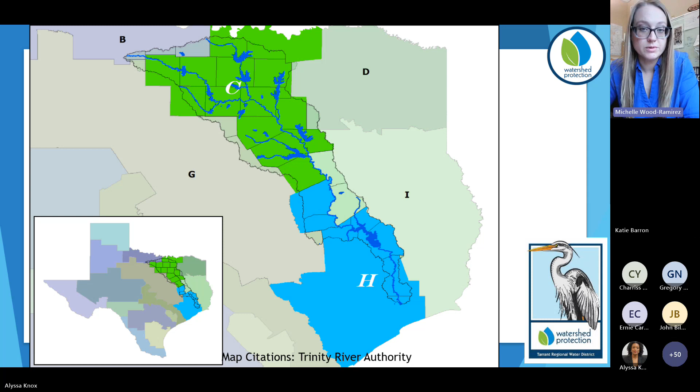You could go to the next slide. Yeah. So this is another slide that I had from TRA, and you can see the Dallas-Fort Worth area and then the Houston area down lower. So I'm going to talk about the DFW area. If you could go to the next one.

So Tarrant Regional Water District, or TRWD, is a raw water supplier, and I'm in the environmental division in the watershed program. I hope everyone knows what a watershed is, but TRWD owns and operates 4 reservoirs, and you can kind of see that there's 2 reservoirs on the top, Lake Bridgeport and Eagle Mountain, and 2 reservoirs on the eastern side of the map, Cedar Creek Reservoir and Richland Chambers Reservoir. And the area that drains into those is its watershed.

And our team is, again, we're watershed coordinators. We do source water protection. So we don't have any jurisdiction in the watershed. We only have carrots and incentives, and we can offer our staff time and advice, but we want to amplify and promote best management practices for source water protection. And our office is located in Tarrant County.

So if you click one more time, okay, click a few more times.

So this is some really fun facts about our program in the district. The district does a lot more things than just watershed. We're a very, very tiny portion of the company. Ultimately, the water that we have in the reservoirs and pipelines is pumped back up to the top to Eagle Mountain and then distributed down through the water supply system. And ultimately, it serves over 2 million North Texas residents.

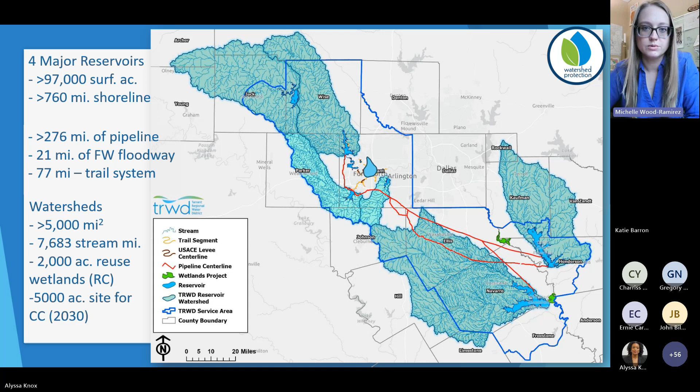But I wanted to put everything in perspective of why stormwater is really important to not just our office and our company. Eventually, it all will fill up our reservoirs, but the district also does flood management. There's a recreation component. We're a local sponsor of 21 miles of the floodway through Fort Worth. So the district does a lot of things, and being a good steward and leading by example is one of the things that we're able to do here. So we're going to look at what we've done on campus now that we know how we fit into the bigger system. If you could go to the next slide.

All right, so the TRWD Rainscapes is, like I said, at the Fort Worth campus. And these polygons here on the screen highlight the different best management practices that we have demonstrated here. So rain garden, the overlook is that pink area. That's just the name that we call it. That's not a BMP, but at the overlook there's a big elevation change. That's where we've demonstrated our permeable concretes, our grass pavers. The rain garden is part of that system.

And then what's brown is the stormwater landscape. So those are our native and adaptive plants, water conserving, drip irrigation wherever possible. And we also have some rock channels and bioswales incorporated into those systems. So you'll see some videos of that later. And then the orange is a bioswale, and what I'm going to talk about for the construction lessons learned is our wetland, our redesigned stormwater wetland.

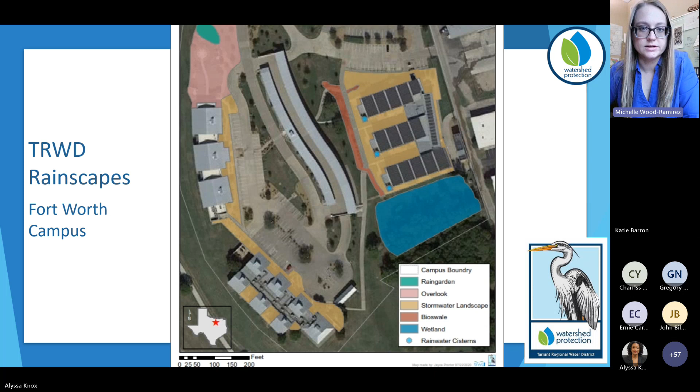So you could go one more. Okay. Yeah, if you can finish off that side, that'd be great.

Perfect. Okay, that's fine. What are rainscapes? So we are calling this the TRWD rainscapes. I didn't come up with the word rainscape, but it's right. You think of landscape or xeriscaping or different things like that. So a rainscape is the design to reduce stormwater runoff. So ultimately, we want to make the stormwater an asset instead of something that is affecting us negatively.

If we think about rainwater or stormwater, that's really pretty much the same thing, but the connotation you have with it is different. So rainwater, rainscapes, rainwater harvesting, utilizing it as the asset that it is, and designing your landscape with the plants and the slope and the bioswales so that we can hold it in place. Again, it slows down the peak flow in the hydrograph. So flooding is really important in urban areas, but also the water quality improvements are really great. And then the added benefits are recreation, air quality, heat island, wildlife. So there's a lot of benefits, but that's what a rainscape is. The link at the bottom is where I got the idea from, if you're interested, Montgomery County, Maryland.

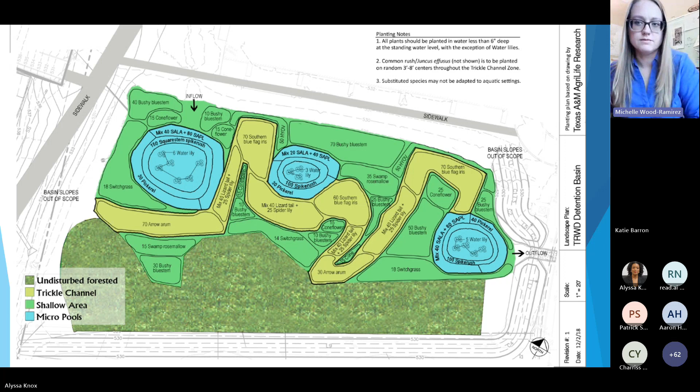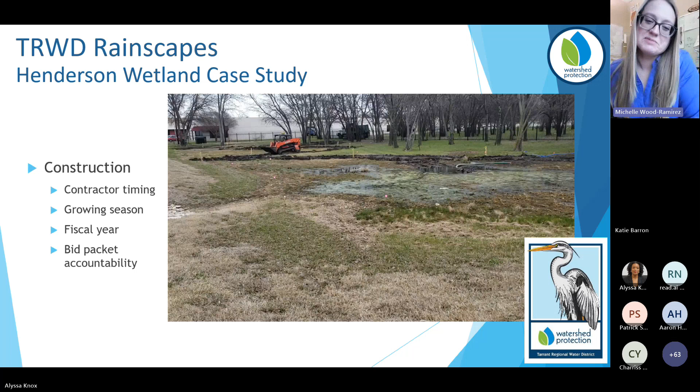The design phase is really critical for internal stakeholders, or your community if you're doing this in an HOA. So stakeholder building is really important. Design, planning, getting everything done, and then construction. My dad had a construction company when I was little, and so I just thought that I knew things about construction. But again, with that bid packet process, trying to find allies for that and learn a lot about that before you start a project, I would really suggest that.

Vendors, again, because of that meso project scale: the residential landscapers are great. They have the talent, but it's very hard for them to go through our CivCast process and our budgeting system and get the insurance they need. So it's very hard for them to scale up to work with a state agency and go through all the formal processes. And again, it's not going to have the price tag to attract the bigger companies.

So one of the things that we're doing is trying to partner with different groups or agencies so that we can do more training, more certification, like Green Pros, so that we can train people to be in this niche market, because there's really no vendors that bid on the big projects. It's very hard to find people. And then final inspections, that's also really key, to know exactly what you want before you sign off on their last check. And then I've already talked about everything else. So you can go on to the next one.

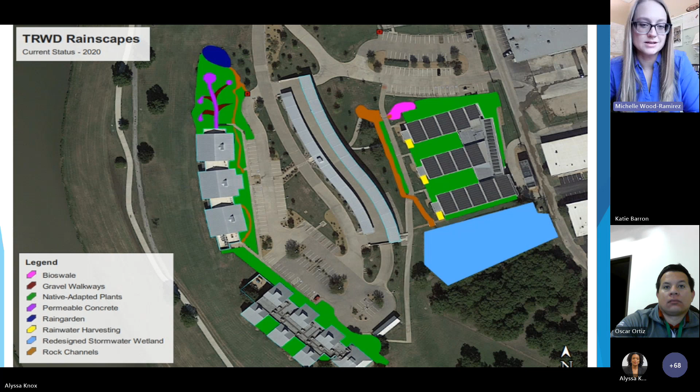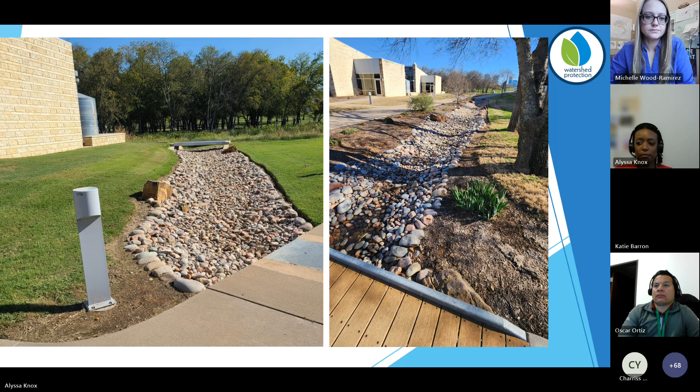What happened in reality is that the edge kept going farther and farther back, mostly defeating the purpose of having grass in the first place, because there's no grass. So that's another huge issue we're still trying to deal with. You go on more. Buffalo grass getting driven over and mowed. It's supposed to be mowed once a year, and they mowed it anyway. So that was this spring. Super fun. If you could go on more.

So if you go one more. This is something we tried with our contractors. It's what we have to submit to the city of Fort Worth. It's in English and Spanish. And so far I haven't gotten a single contractor to fill it out. So, but I have it and we do try to work with them.

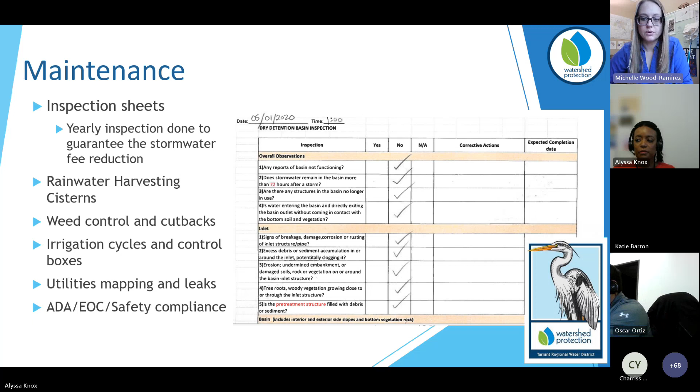And there's a ton more maintenance issues there as well, but I did highlight like the weed control, cutbacks, irrigation, leaks. And if you go one more. The only way we've been able to address some of these things is education. There's not like fines or anything we can do. And then switching to a new company isn't really an option again, because our vendors are limited. The skill set is limited,

and we just need a market for this, for green stormwater infrastructure in the region. We're going to be doing it a lot more. So we're working on how to do trainings for that. We do a lot of education for the public, but also for professionals in this area. And then in order to justify things, recognition and awards is important for our board to justify some of the money and time.

And it's a demonstration project, right? I'm a scientist, so I want to learn what works and doesn't. And that is not always a good sell. So we have to find data and metrics and make sure that we can also do that side of it for the public facing side. One more.

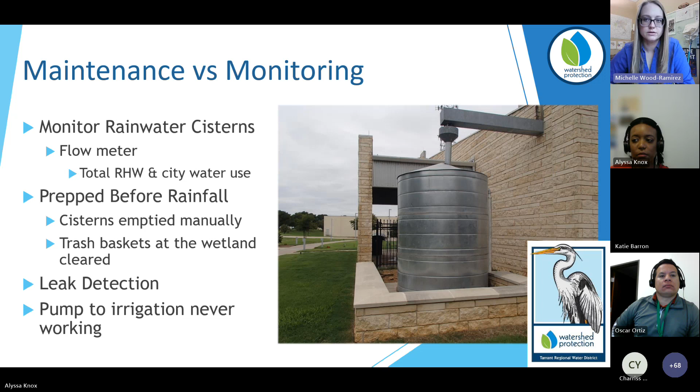I don't have time to do this. I normally don't. But again, maintenance versus monitoring, the photos, who comes. So if you're going to build this, also building in a monitoring program as well as a maintenance one might be a really good idea, so that you have what you need to write awards and go for grants and things like that. So I just wanted to clarify there's a little bit of difference in those two aspects of it.

Yep. So be as specific as possible. Don't do the cheapest bid. Please don't do it. I don't know if that's good justification when you are comparing things. And then the more you can have relationships, engagement, and your internal and external collaboration and stakeholders, the smoother it's going to be, I promise. But it is a lot of work.

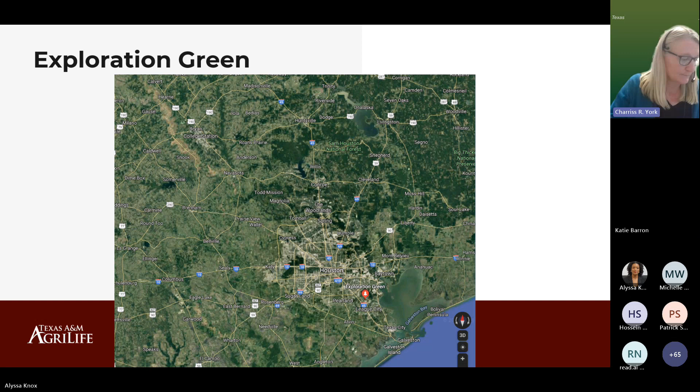So let's go next. Yeah, so this is a view of what this area looks like now. And when I look at this aerial, what I see is typical suburban development. We see single family detached homes, we see fairly large roadways, we see lots of impervious cover, whether that's roadways or parking lots or rooftops, and that has led to increased flooding, degraded surface water quality.

Every water body in this area is listed as impaired by the Texas Commission on Environmental Quality, mostly for high levels of bacteria and low levels of dissolved oxygen. And in general, there's a lack of green space.

And so because of this flooding issue, the Clear Lake City Water Authority, who is the entity in this area tasked with taking care of both the drinking water and the stormwater, started to explore solutions for the flooding issues that they were seeing.

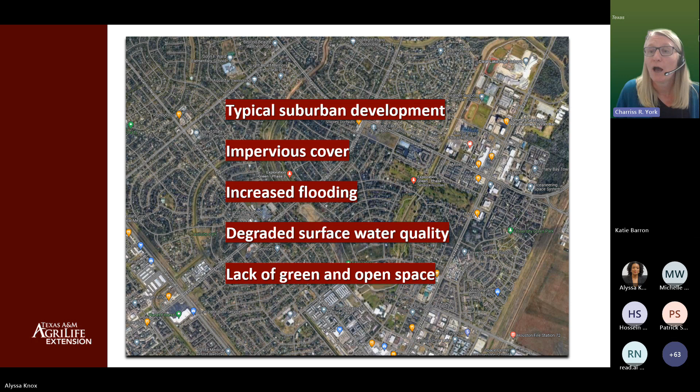And so looking around the community, they were getting a lot of input from residents that they wanted to see some sort of additional parkland or more areas, or could we use some of these wetlands they were hearing about, and how could these things fit together? And so next, they were able to, one more, identify a golf course.

So back in the 1960s, the height of living and what everyone wanted was to live on a golf course. And so golf course communities popped up around Johnson Space Center. But over time, less people were interested in living on the golf course. The golf course was not being utilized as much. And so it had really become an eyesore. It wasn't being used for anything.

It was defunct. And so the Water Authority saw this as an opportunity, and they were able to use their power of eminent domain to purchase this golf course. That was after a lot of studies were done, conversations were held with the public about what they wanted to see and how it could look, and they came up with this master plan. Next.

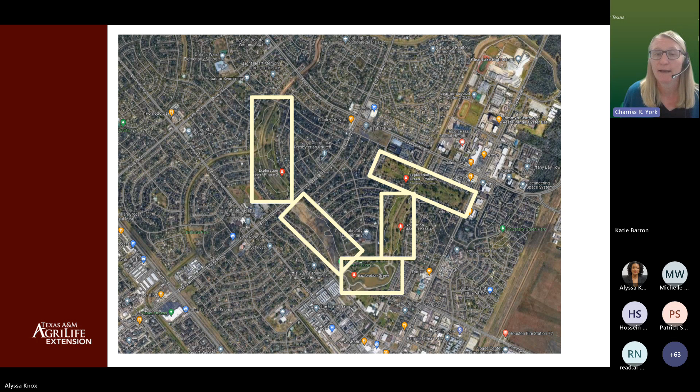So this is the master plan for Exploration Green. It's almost 200 acres of what was previously golf course that's been re-envisioned as a stormwater detention and nature park. So part of this project is about 40 acres of constructed stormwater wetlands, as well as a 10-foot wide concrete

hike and bike trail, native tree plantings, and tons of different types of habitat for suburban wildlife, things like bats and birds and bees. And we even see alligators and nutria in this area. So we're going to talk for just a minute about constructed stormwater wetlands and what makes them different from a natural wetland system. So that's our next slide.

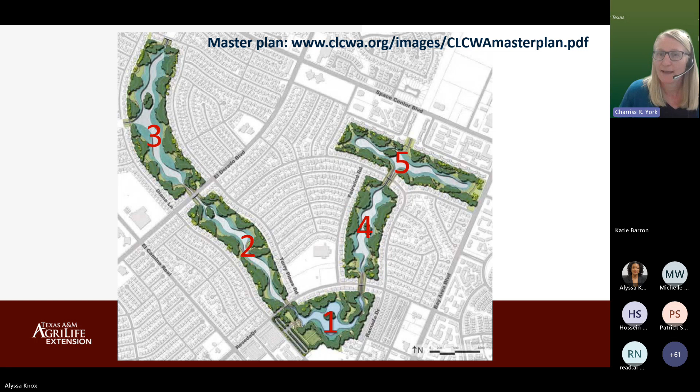So Michelle mentioned a little bit about the constructed wetland that they had built at their site. And I want to talk about how they're different from a natural wetland. So these are very engineered systems that have some very specific requirements that we look for in them. So because they are stormwater detention, we need to make sure that they are deep enough to hold the water.

And as Michelle mentioned, there's permit requirements. They need to hold water for a certain amount of time, not hold it for too long, make sure of releasing that water. There's all of those components that need to be considered. From a water quality perspective, you want to hold the water long enough that the wetland plants and the biofilms and all of those components of the wetland have time to actually filter and treat that water.

So the image on the right and the different colors, the dark blue is what we consider a deep pool. It's usually about 2 foot deep. And we're looking to hold water there most of the year. So this gives a spot for any of the fish that find their way into the system. Even in the summer and a drought, when things are getting really dry, we have a deep spot to hold that water and a point of refuge for those species.

We're also looking to move the water intentionally through the system to give us a longer residence time for treatment of that water. And so there's some shallow zones and some intentionality to how the design of the water flows through there. But then we also have plenty of room for that to fill up and to be inundated for short periods of time, up to about 72 hours while that water draws down.

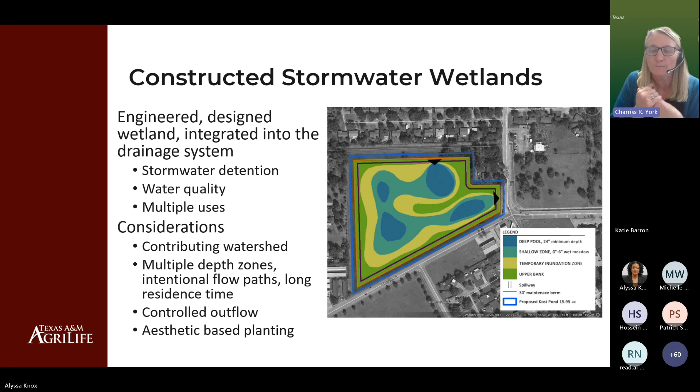So I think that's all I want to say about some of the specifics of a stormwater wetland or constructed wetland and how it's a little bit different, and some of the things you might consider during the design process. So, okay, we're going to skip to the next slide.

Okay, so we're going to go back to Exploration Green now. And I told you that Exploration Green used to be a golf course. So I have a couple of pictures for you. I should say that it's a 5-phase project. Phase 1 began construction in 2017. And actually phase 5 finished construction in September of this year. The planting is still ongoing for multiple phases, but the actual construction of the ponds and things has been completed.

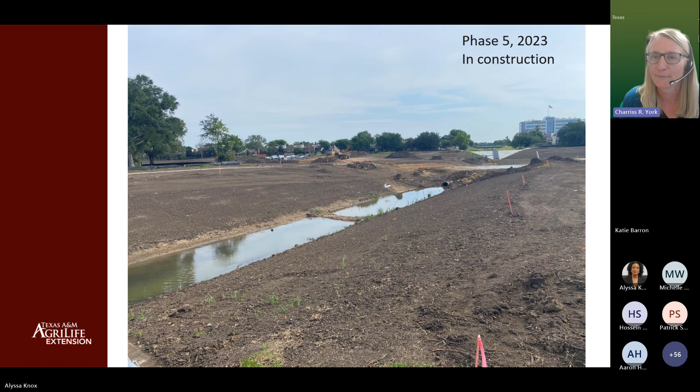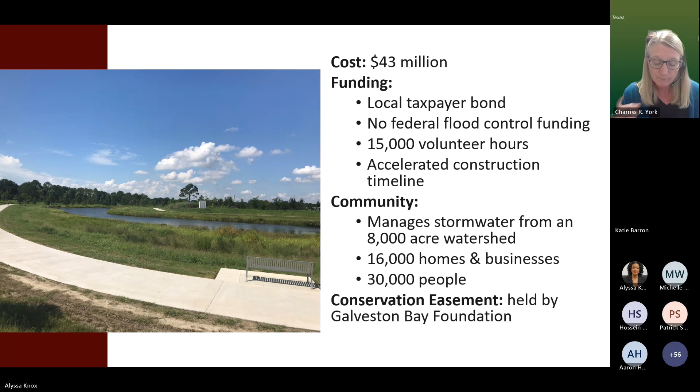And they did that because they realized moving forward, because it is an elected board, that the folks who started this project could be voted out at any point, and the intent of this project could change. And so they put it under a conservation easement so that it will continue to be a nature park and to be used like this for a very long time to come. And it cannot be sort of redeveloped into apartments or housing or anything like that. So let's go to the next one.

But 150 homes and businesses that were previously flooding did not flood during Hurricane Harvey. And the only difference is that this project has been started. And so that was a really great advertisement for what this project could do. And the community was really excited about that. And they asked for the construction timeline to actually be decreased so that they would be protected sooner. And because it was paid for by local bonds, the Water Authority had the funding and they were able to shorten the construction timeline.

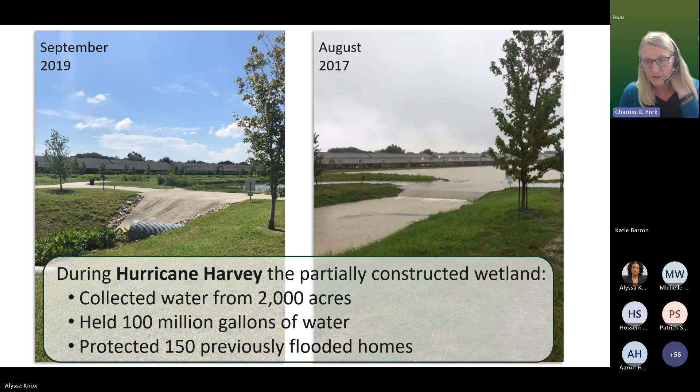We're going to shift gears. In the last few minutes that I have, I'm going to tell you guys about two much smaller constructed stormwater wetland projects we have in the city of Houston. These are with the MD Anderson hospital system. So these are in, it's not technically downtown Houston, but it's the part that most people would call downtown Houston with the high-rise buildings in a very urban area.

There we go. So MD Anderson has a general approach with their landscape, with their facility in general, thinking about health with every component of their system. And so whether that is how they're dealing with patients or what their rooms' design looks like, but also down to the way that they design and maintain their campuses. So they're not using chemical fertilizers and pesticides, so they're reducing the patients' exposure to things like that. And so it only made sense that those goals would translate into how they are managing their stormwater.

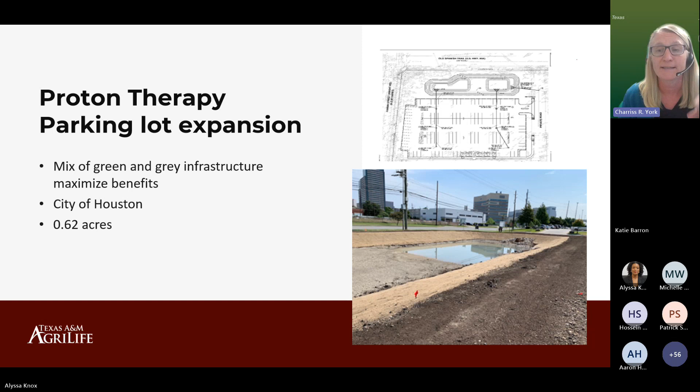So you can see that deep pool at the end, which is where some of the sediment and things are able to drain off. And then you see a higher area that's dry right now. And so that's a wetland shelf that gives us more room to plant the wetland plants; it's a little bit shallower and provides some more treatment area. So I think the next picture shows us some different images of what that looks like.

But some of the feedback that we've gotten from MD Anderson is that the outfall of this still goes into the storm drain system and into their gray infrastructure. And I think at this facility, they actually have an oil separator downstream, further in the pipe system, that they used to have to maintain and clean out pretty frequently because of everything that was coming from the parking lot. Since they built the wetland, they've actually been able to reduce their maintenance of that because the wetland is taking a lot of that out of the system.

And so it's working in conjunction with their gray infrastructure. They're able to reduce some of their maintenance on their gray infrastructure and increase the longevity of that infrastructure by adding this green into the mix. So that's just one example of how the gray and the green can work together.